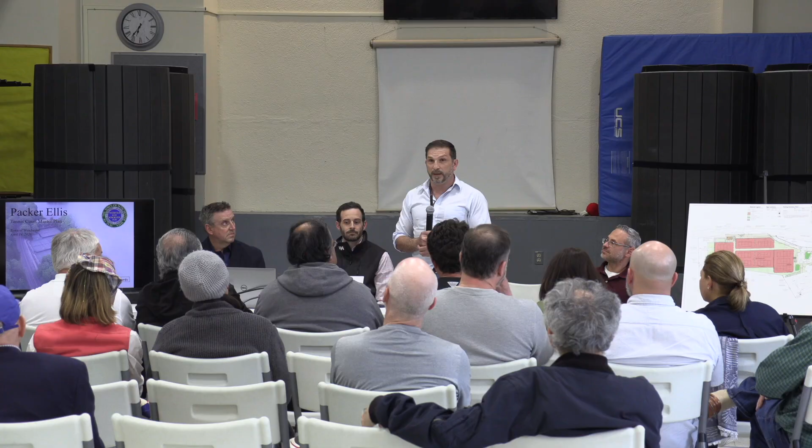As a reminder, this is a very intricate area. There's a lot happening with stormwater, the pond. The courts are over 100 years old, so it is a process, and we're getting there though. We talked about a couple years ago when we were just trying to get the wheels turning on this. It's moving, and that's a great sign.

Again, we still have a little bit more design, so we welcome feedback at the end. But I'm going to pass the mic over to our development team.

Thanks, Nick. I'm going to stay seated if that's okay with everybody. I apologize, but I'm running the computer at the same time. So can everybody see the screen to my right?

My name's Chris Huntress. I'm with Huntress Sports. We're landscape architects and planners. We specialize in athletics and recreation projects. We've been working with Jeff and his team over at VHB who are coordinating the civil and engineering side.

This is a multifaceted project. It's got parts of it that we're touching up in Palmer Street. We're talking about working in the floodplain. We've got 100-year flood here, and we're into wetland buffers down by the beach as well. So there's a lot of moving parts here, and a lot of reasons that we did what we did are driven by the regulatory aspect of some of the things that we have to deal with as well.

So I'm going to walk you through. Many of you know this site, I'm assuming most of you do. But this is an overview of just the bank of the existing courts.

This is very hard to read, I'm not going to ask you to look at this too much, but it is the existing condition survey. The reason it's here is I wanted to let everyone know we've surveyed the site, we've flagged the wetlands, we understand where the utilities are, and we understand what the opportunities and constraints are associated with this site.

So that was one of the first things that Jeff and his team did. As we advance from the existing conditions, one of the first things we did was create a master plan for the site that addressed some of the major needs. We left the orientation of the courts predominantly as they were in that east-west organization. There were, I believe, 15 courts, Nick, do I have that right?

And we've gone to 13 courts. Where we've eliminated courts are in the two banks in the middle, we've gone from 4 courts to 3 courts. The reason we've done that is, A, to give a little more separation between the courts so we can be more compliant with USTA requirements, but also to create that walkway access that would bring not only players but able-bodied and disabled individuals through the site. So that creates our accessible route to get in and around to the various courts.

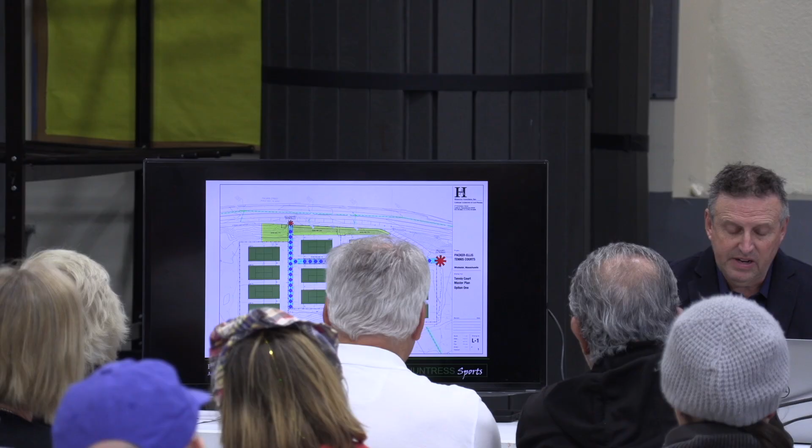So we started with this as a concept plan and then developed it into a set of working drawings. Some of it changed, but predominantly it stayed the same. This is the overall site plan.

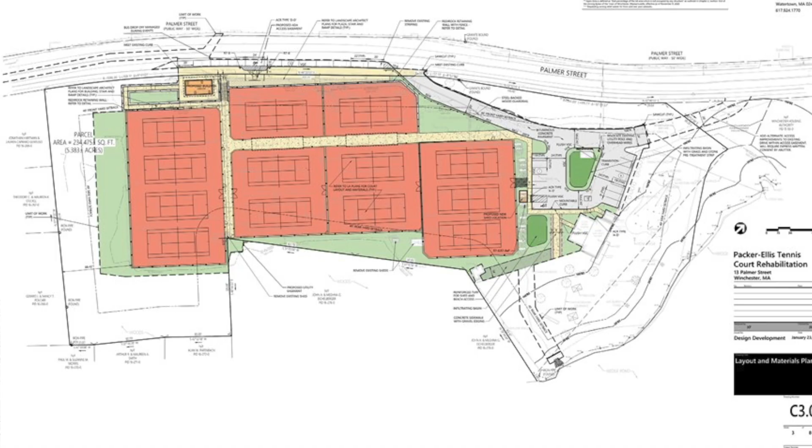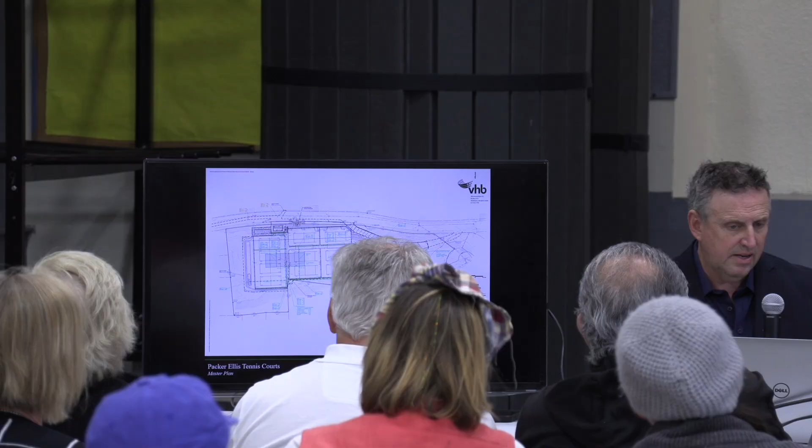We're at a total of about 13 courts with a concrete walkway that comes from the renovated parking area through the main body of the courts, and then goes perpendicular to Palmer, up through a set of stairs and a ramp system. We've placed a building up at the top along Palmer, which would be a check-in building, bathroom building, and the like, and we'll get into that in more detail. I'm going to turn this over to Jeff and let him talk a little bit more about some of the site utilities and grading and drainage issues.

Good evening, Jeff Ketteritz with VHB. So as Chris mentioned, and I'm sure you're all aware, grading and drainage and stormwater are significant considerations for this site, given our constraints with Wedge Pond. This is a unique site where it's kind of the low point of a lot of adjacent areas, with a lot of drainage coming onto this site.

So we've been studying and looking at the project itself and what we can do to mitigate that stormwater flooding and runoff, as well as trying to look at additional areas abutting and what we could do to keep water off of the courts primarily.

A couple highlights here. This is the grading and drainage plan, as Chris mentioned. Just about the entire site is within the 100-year floodplain. One important part we focused on in working with Nick and Matt was locating the facility building elevated up at Palmer Street, so it gets those facilities out of the floodplain in proximity to the street.

The courts will still remain within the floodplain, but this project includes substantial stormwater infiltration systems that will help mitigate that runoff. The gray boxes you can see are subsurface chambers that would be beneath the courts, intended to store and infiltrate stormwater runoff.

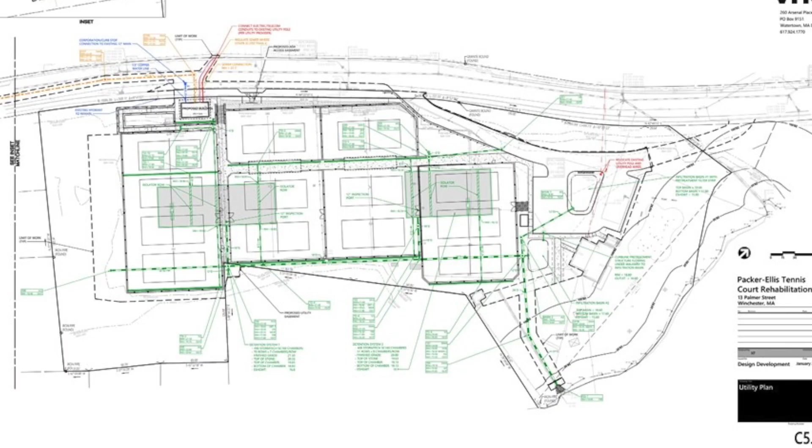The parking lot includes two surface basins, one in the middle of the parking area and one just to the south. That's intended for stormwater to sheet flow, provide water quality treatment, and get stormwater off the parking and tennis court areas.

Yes, perfect. The dark green there.

I'll flip to the utilities real quick. The green infrastructure you see here is the drainage system. As Chris mentioned, we did a full site survey. What we found of the drainage was limited at best, some pipes not functioning entirely, maybe blocked up. So the plan of this project is a full replacement of the drainage system to ensure it's functioning.

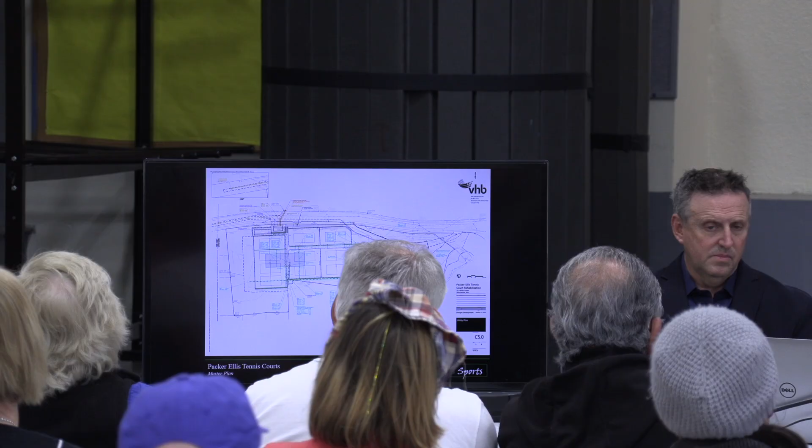This includes replacement up to the outlet at Wedge Pond. As part of the next steps, we'll need to go through the permitting process with conservation and planning to complete that review. But the intent is a full replacement of the drainage system to ensure it's functioning.

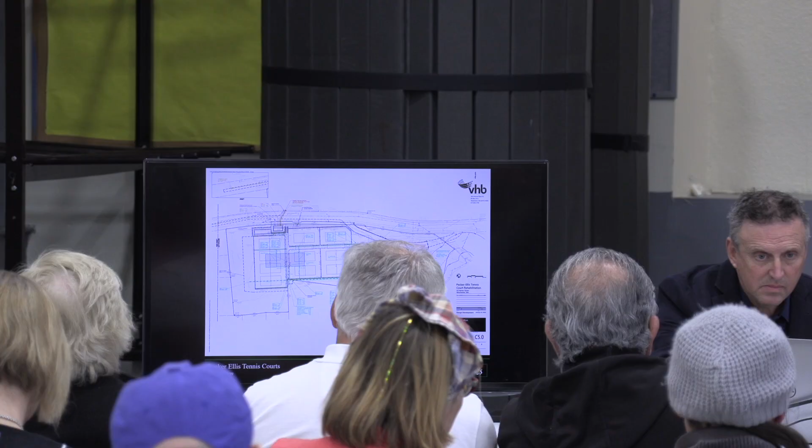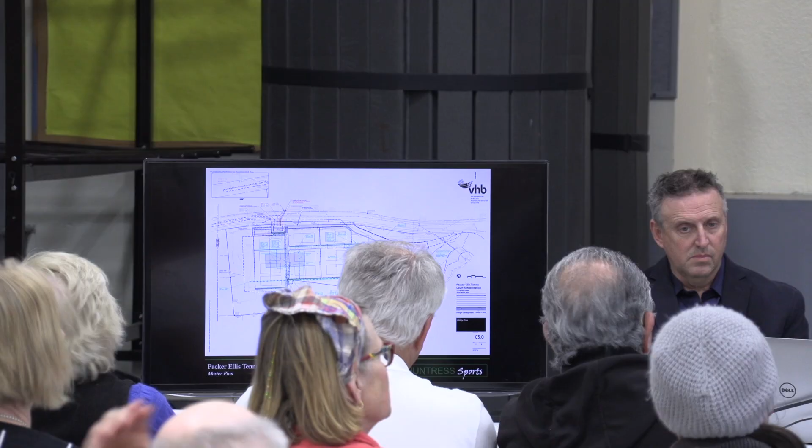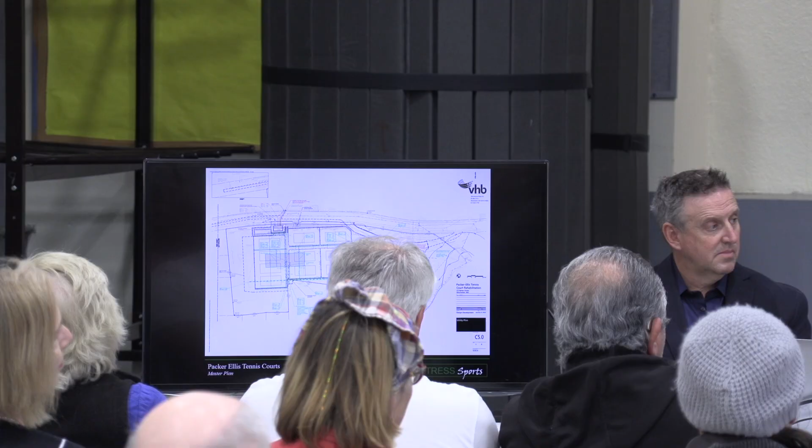Other utility-wise, the benefit of locating the facility building, which Chris can get into in more detail, up by Palmer Street, is it locates those services closer to the mains. There are some restrooms as well as the ticketing area or an office space there, with water, sewer services, as well as power to that building. So the intent is keeping that closer to Palmer Street and also, importantly, out of the floodplain.

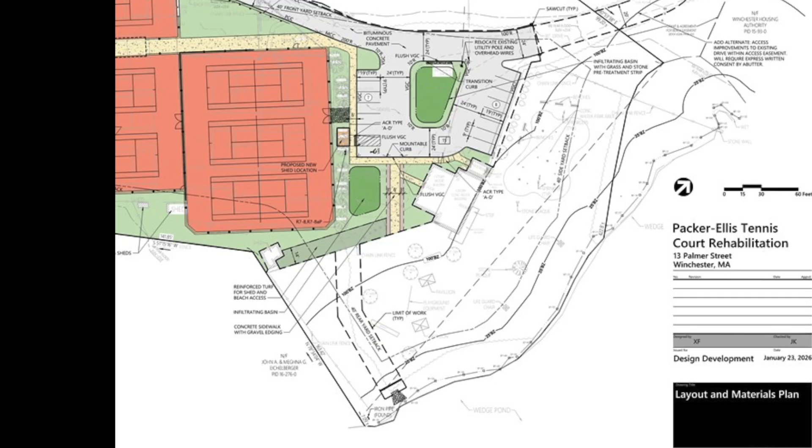This is an enlargement of the parking area, to speak to the circulation. The intent is keeping the general layout of what's out there, the gravel drive coming off. Some of the challenges: the existing drive down is probably about 12 feet wide or so, not really conducive to getting emergency vehicle access down there if it's ever needed. But we try to reinforce the parking, providing adequate drive aisle width.

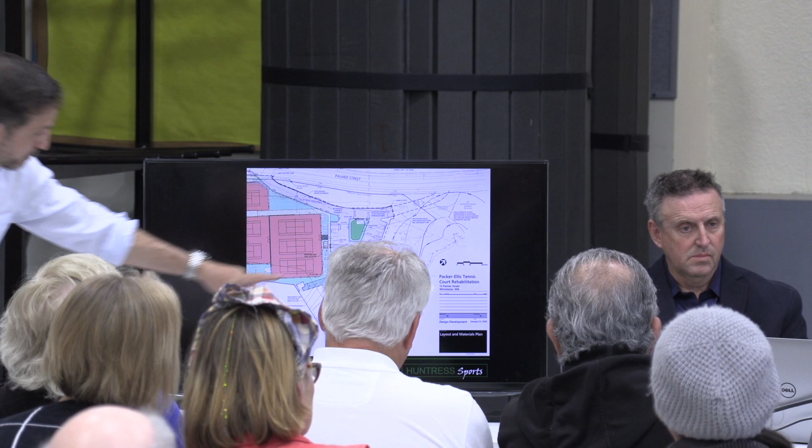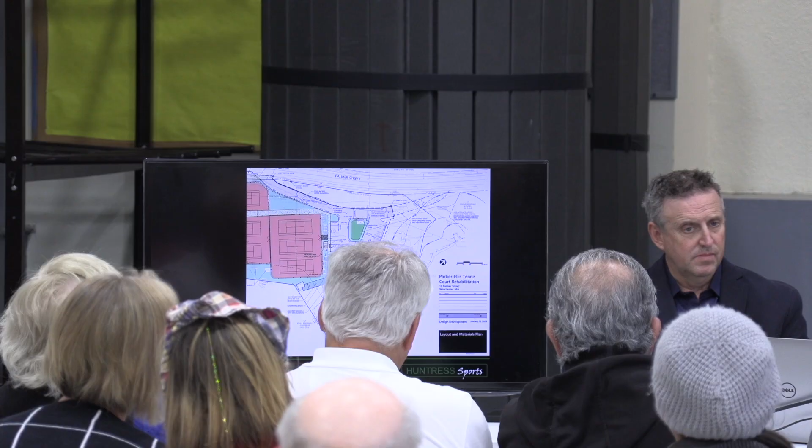So the plan includes reconstruction of the entry drive down off of Palmer Street, which is the gray hatched area, and then a bit of a loop of the parking. There are 15 parking spaces created here, including accessible parking spaces nearest to the sidewalk accessing the courts, and the intent is to maintain the existing egress drive out through the adjacent parcel. Technically it runs through the adjacent parcel from the housing authority, I believe, but that access would remain as currently.

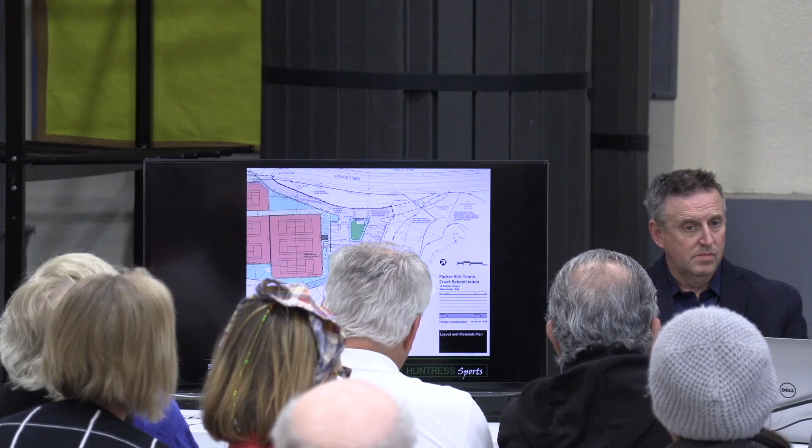There's also a sidewalk connection to the plan south, I'll call that beige, running south and then off to the bottom corner. So there's access for maintenance vehicles for delivering clay and repairing or resurfacing the courts as needed, as well as maintaining an access point to the beach for the town.

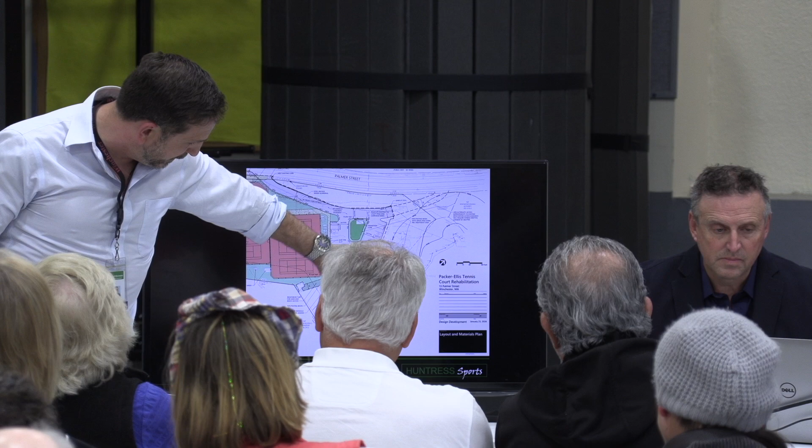Before we jump off of that, their scope ends where that begins, so the new volleyball courts come in here. This is your Wedge Pond, this is all the beachfront, and this is the beach house. The volleyball courts will be here and here. Can the beach house stay? Yes, the beach house stays in this current design; we haven't been asked to take it away.

I did want to point out, one of the things impacted by this new driveway coming into the site, or this reconstructed driveway, is the existing practice board area. Because this driveway got a little wider and the grades associated with that had to go further down into the site, we removed that, and that's one of the things we're working with Nick on, as to where the backboard area goes. We've had that as a discussion topic and are looking for a solution for the next round as we go towards construction. We've got several options, so we're kicking those around.

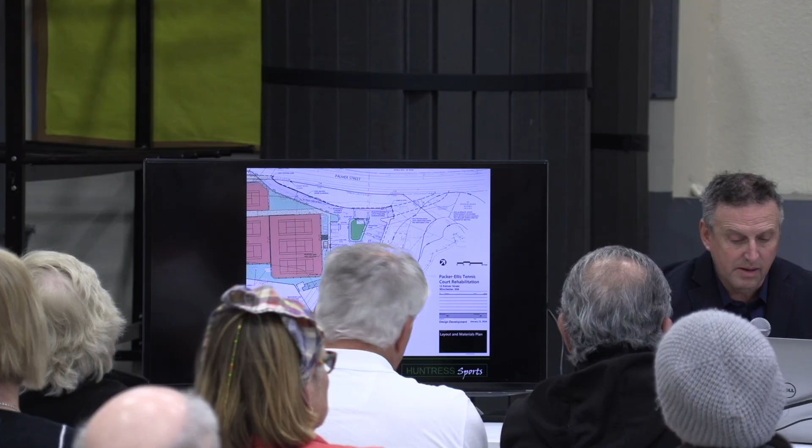We're going to figure out what the plan is. It may go to another facility, it may go somewhere else. If you've got questions on that, I'd be happy to stick around at the end and talk about what some of the various options are that we're looking at.

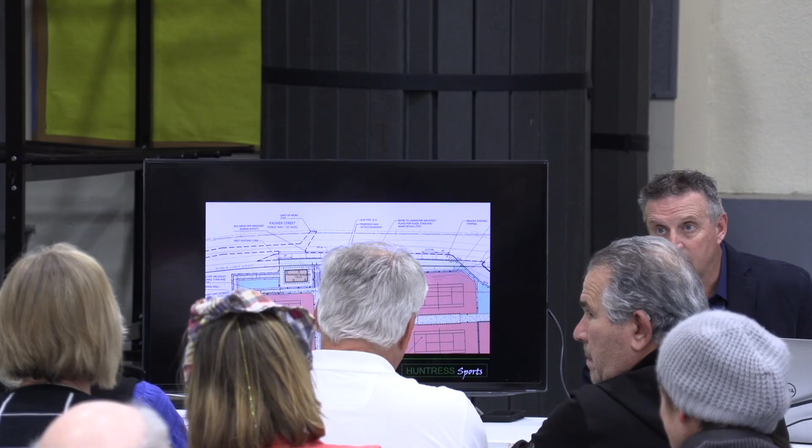The tree would be taken down as part of the plan. Yep, that one's dying actually. We've been holding on, but it's dropping. That's the one branches that people complain about every year because the limbs are dying. It is a beautiful tree, though.

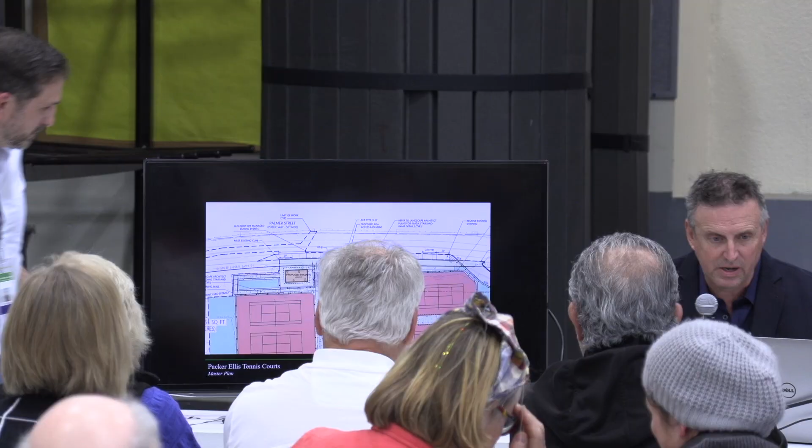So I'm going to walk you through the plan as it touches Palmer Street, and we'll talk a little bit more about the building and those areas. But Nick, maybe you can help me point. Start over by the reconstructed driveway.

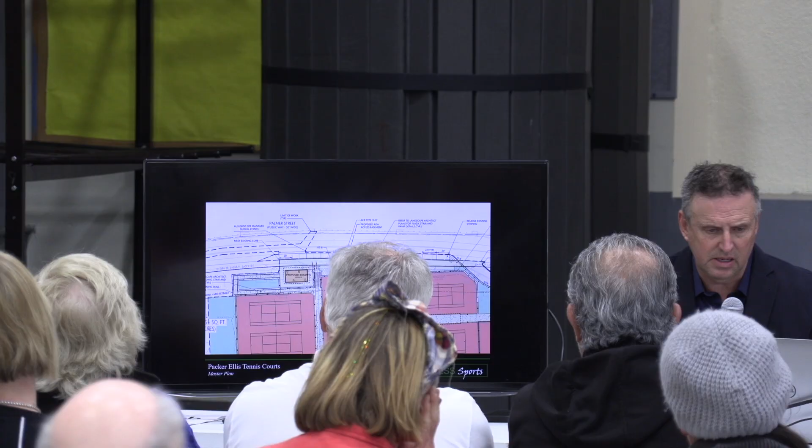We are replacing the wall in its entirety all along the front, and we would have 19 feet off the edge of the courts closest to the wall, from the edge of court over to the base of the wall. The base of the wall is roughly in the location of the existing base today because of floodplain issues. It's about 9.5 feet tall and would run all the way along those two courts.

It would terminate into a set of stairs that would come down from the upper drop-off area and into that middle aisle. Immediately beyond that would be the check-in building at Palmer Street elevation, and further to the left of that would be a ramp system for ADA access that would get you down and into the courts and tie into the walkway.

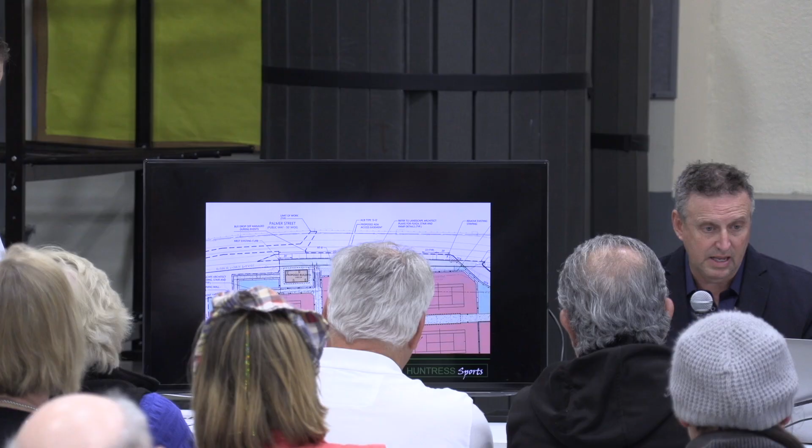So we were able to create what was kind of a secondary egress point into a primary egress point by making it handicapped accessible, getting the building up and out of the floodplain, which has a lot of benefit, and taking advantage of some of those grades and utility access points further down Palmer.

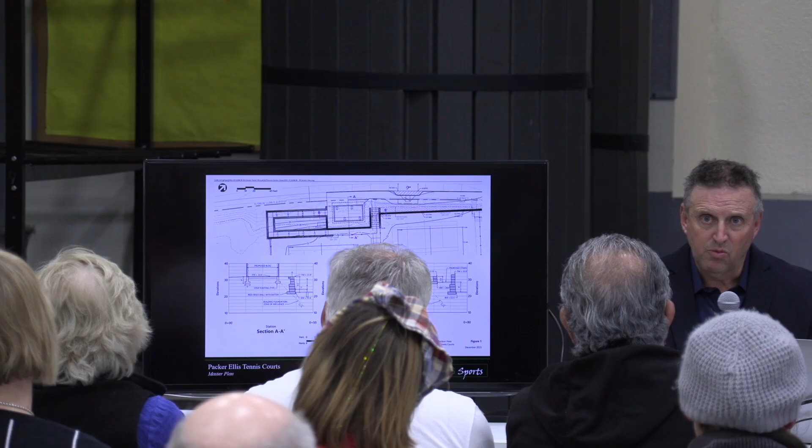I'm going to go quickly over this plan because it's tough to read, admittedly. This is a cross-section through the site that shows some of the grade changes between the building and down to the courts. In essence, it's a 9.5 foot tall wall that would drop down to court level. When you're up at the street, we're going all the way from the curb to the wall. Let me back up there.

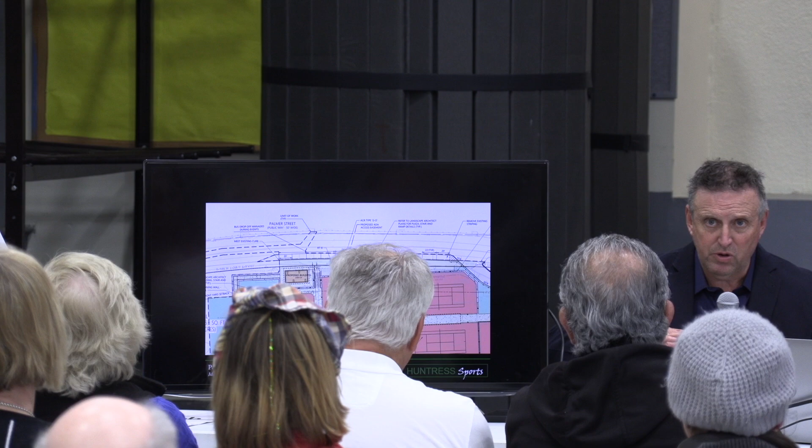All the way from the curb at Palmer over to the wall would be a flat concrete terrace that would effectively give you a viewing area. We can talk about whether we put benches up there, shade structures, or other things, but what we tried to do is create that flat terrace and viewing platform with a 4-foot ornamental fence that would be a barricade.

The existing fence would be gone. The existing walls and the existing cobble slope would all go away, and a new wall would be constructed in front. That also requires some utility work within Palmer Street itself, but provides a much more stable condition than we have today.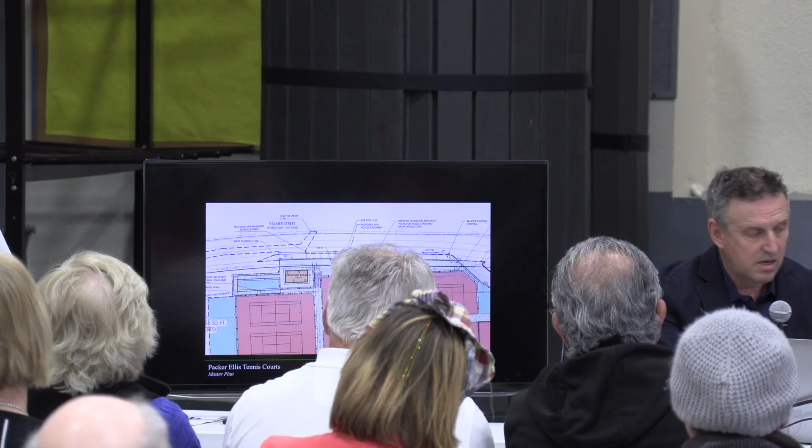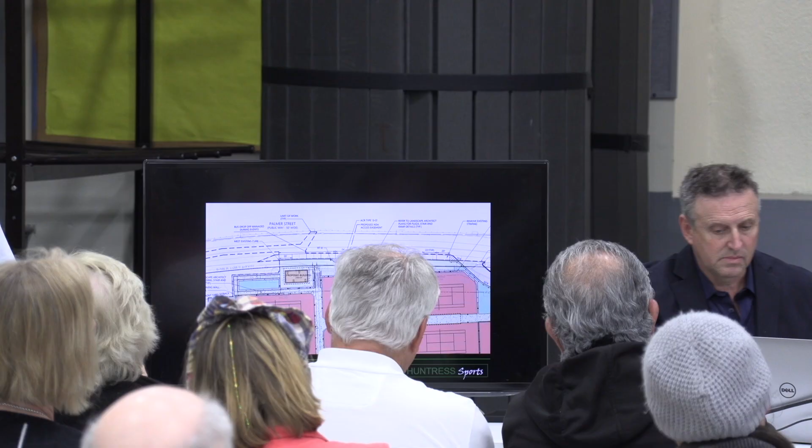And maybe just to tack on the wall note - we studied pretty heavily our options to address the wall. Was there a way we could salvage part of it, repair it? After reviewing with our geotechnical and structural engineers, it wasn't appropriate to do that, which is why we're presenting to essentially reconstruct the entire wall.

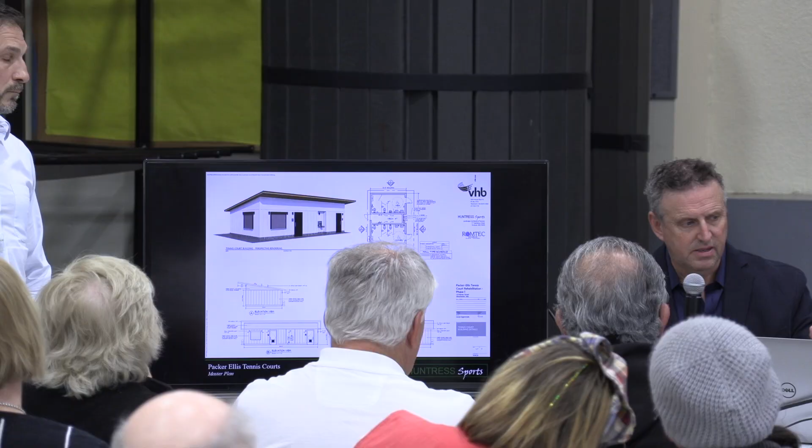Roughly, yes - at its highest point it's 9 feet. The material will be concrete, but it will be faced with what's called a monolithic block. The individual blocks are about the size of this table, but they have a pressed front that makes it look like natural stone. You can get New England granite, limestone face - there are a lot of different options.

Those would be your options on the wall. One of the things I want to point out, which I thought was really important, is it creates a congregation zone where we can gather after tournaments. We can set up tables and vendors and stuff like that. So it gives us quite a bit more space up there to do that, and that was important to us.

What about viewing on this side? The canopy, the existing structure - all of that's going to go away. Gone, correct. Your viewing would be from that upper terrace all the way across the middle two banks of courts, and we left an 8-foot walkway around the back side of the proposed building so you could circulate around the back and see that other bank of courts. I think your visibility down and into the site is actually going to be significantly improved.

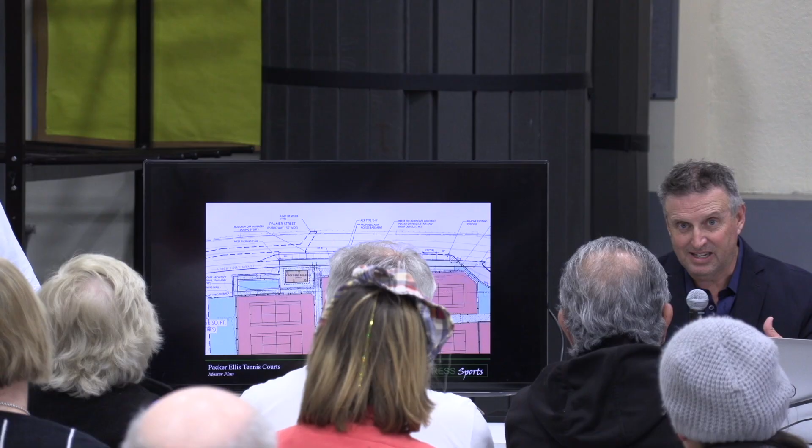We did look at some options that included banked terrace bleacher seating and a few other things, but the cost of that got very expensive very quickly. This was a more cost-effective way to approach it, but I think in the end it's a much more usable space as well, because it gives you a lot more flexibility up at the top.

Currently there's one long bench. Right, so it's been accommodating for the most part. It's not like you need a bleacher there. I don't think so - I think we may want to consider some benches up here. My thought was we would do some backless benches through the middle of that space. You could face either way.

Much of everything that you see on the existing hillside now—the walls, the fences, benches, trees—have to go, because that's all concrete. We poured concrete, put in all those.

If there are benches that can be salvaged, we can take those out before we do the demo and save them to reuse. We've done that on other projects, so if they're in good shape, we just relocate them. People have purchased those and there are name plaques on them—that was a beautiful area to sit and watch.

The problem is it's not presently handicap accessible, so we can't keep it as is. We can salvage those piece benches though.

What we want to do with this area is encompass it to create a beautiful sitting area. We anticipate benches, shade structures—that's all in this plan. We've even talked about some lights along here to give more visibility and make it safer when it's dusk and you're leaving.

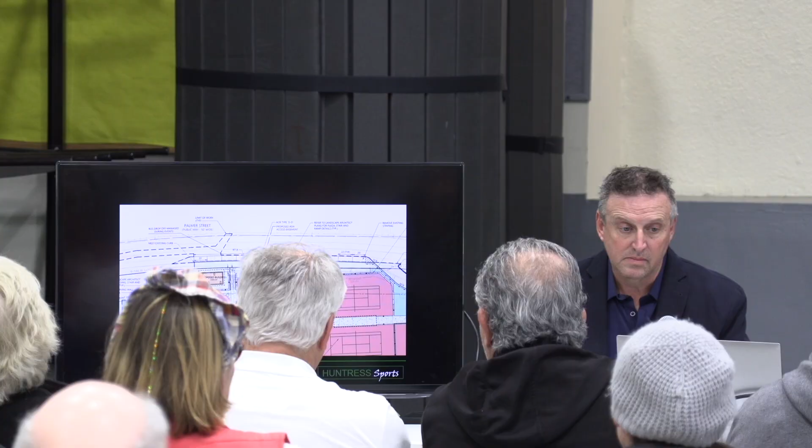Right now, for example, we've expanded this to 3 or 4 picnic benches. Whenever there's a tournament or a Friday night social, we bring in food or drinks, and this becomes a continuous meeting place. I think you'll have more space to do those kinds of activities in this plan than you do presently on the current site, and it will be accessible to everybody.

By having it in this area, the viewpoint to these courts is a bit more difficult since this is gone. That's right—there is not seating over in that area.

Let's say there is a fountain here—that's where the handicap ramp comes down.

Think about how it goes down, it'll be kind of a wall—there'll be a series of terrace walls through that. But this will all be areas where people can also gather.

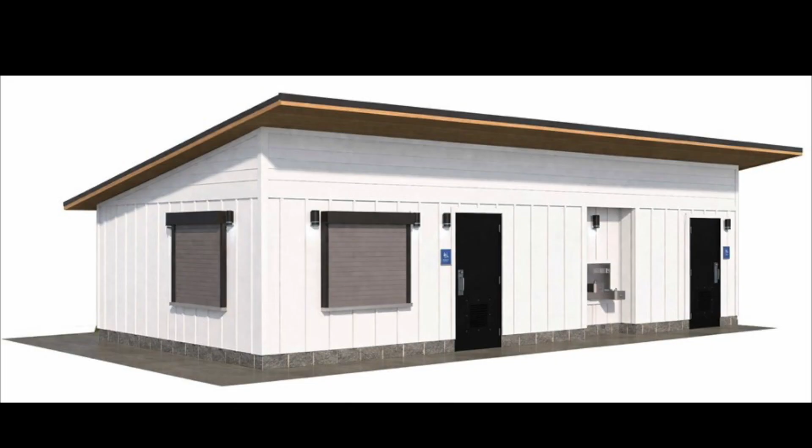This is an example of what the building would look like up on Packer Street, and this is where we are today. It could be like this, it could be different, but this is one example.

The program of this building is that the two roll-up windows you see would be the location of the check-in and office component of the site. The two doors just to the right would be a women's room and a men's room, and you see a water bottle filling station in the middle. There would be some storage and mechanical space within the building, but the primary goal is office and check-in space on the left side, men's room, women's room, and utility corridor access.

So it would be a single-slope building with a board and batten finish, using fiber cement board and batten like a Hardie plank type of finish—here's a better close-up look at it. This is a fairly efficient building, and I think a reasonably attractive one as well.

Having it right up on the arrival point at Packer provides a lot of value. The other important thing about bringing it up to Packer is it made our utility connections for water and sewer much easier, since the utilities were significantly closer—not right there, but closer. That's a water fountain and a water bottle filling station.

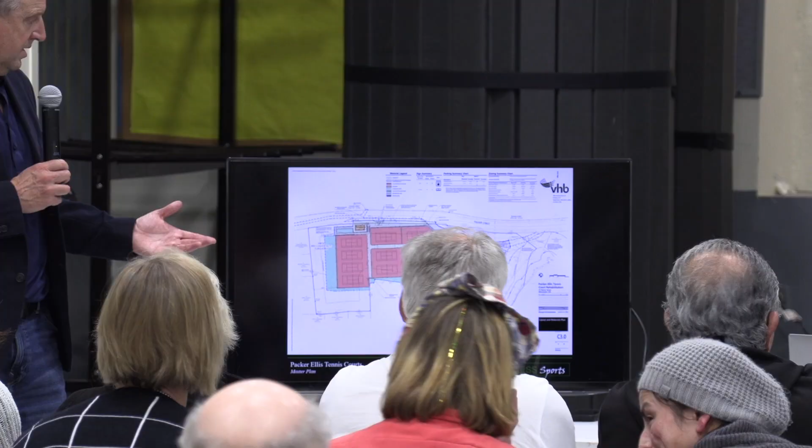We do have some green space that we've created up around the top, mostly within this ramp area. We've got green space through here that we can plant. We haven't talked much about it, but Nick, if you wanted street tree plantings around Packer, we could do that. We've certainly created room for root growth by moving that wall, or that walkway terrace, out.

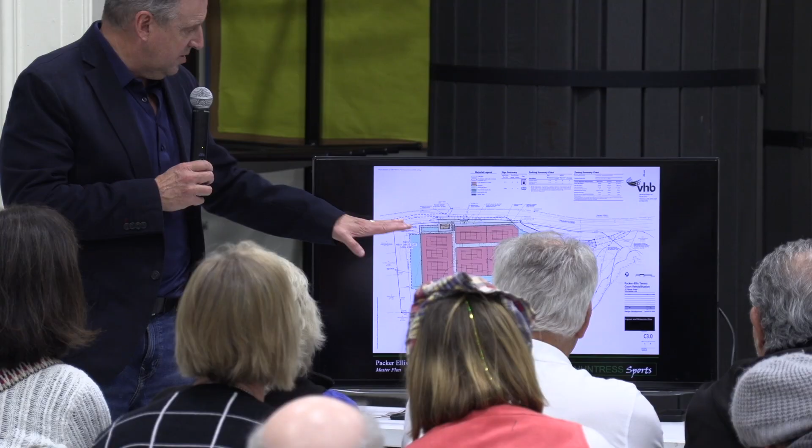But beyond that, we'd have to look at periphery areas—say down in the parking lot by the beach, or potentially up by this ramp, or off to the side. We own a little bit more land this way. This area is predominantly forested through here.

There'll be a little bit of clearing of some of the pines in this area for a couple of reasons. One is for stormwater, the other is to get some of the pine needles away from the court surface here. But there's room around these peripheries to plant if that's what the town would like to do.

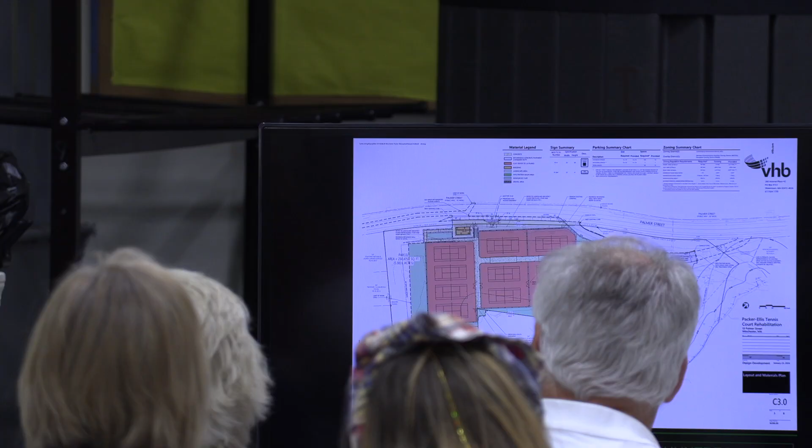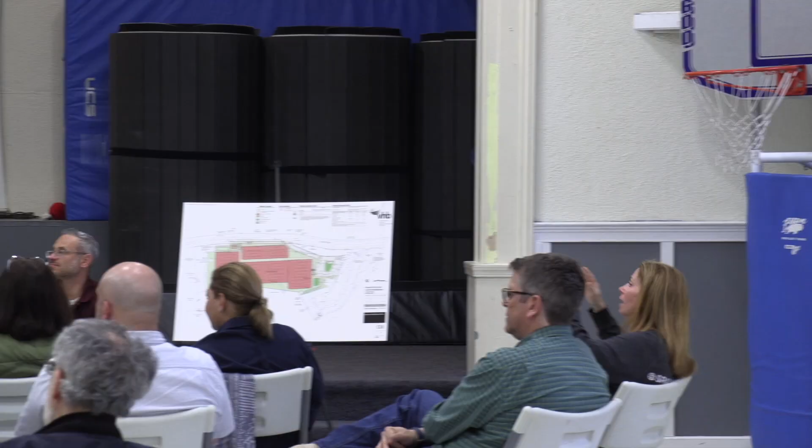What about irrigation? Are they gonna be sprinklers or underground? It will be a little bit of a combination of both, but we haven't designed the irrigation system yet. It's part of the construction document phase. Right now we're just trying to get everything organized. Obviously, other places, when irrigation is under the courts, it's much more even. I expect it'll be a subsurface irrigation system. I just have to coordinate it with all Jeff's utilities.

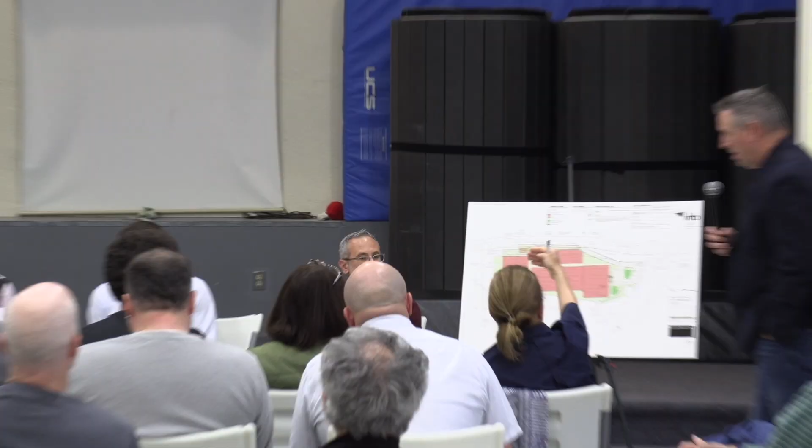That's huge. Yes, there was a question down here. So this area where the slope is for the handicap, right here, the middle, the green. Yes. What do you anticipate? Is that okay, since the slope is down, could you put bleachers there, for example?

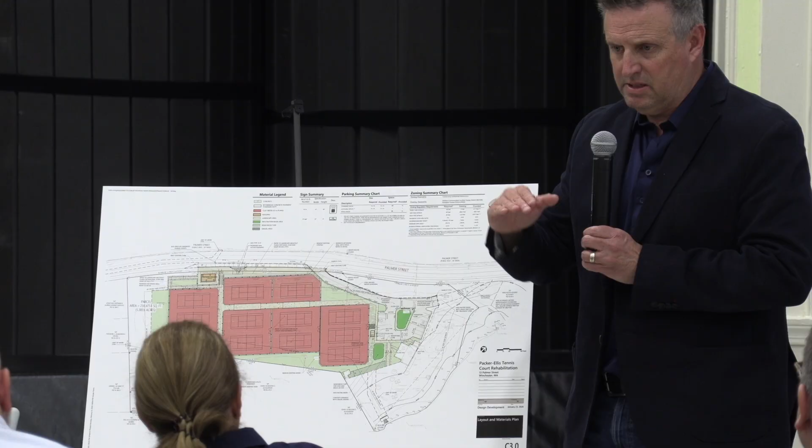We could consider a terrace or a bleacher in there. It's an odd space because this wall that is along the interior is going to be constantly changing in elevation as it moves around. What we would have to do is pick up this wall basically to the elevation of where this building is and create kind of an extended platform over here. So the short answer is, could we do it? Yes, we could. It would be dramatically expensive because of the wall work and the additional site work that would be required there.

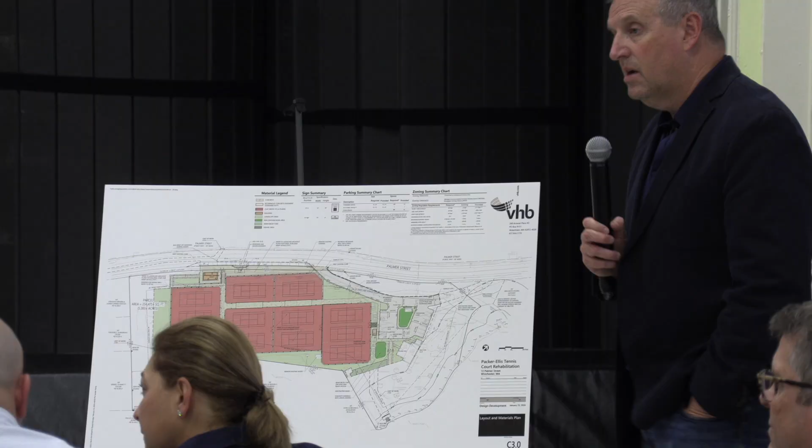Possibly, yes sir. What's the odds of this getting passed? Does the town have to vote? I'm not a gambler, so I'm gonna give that to Nick. We don't want to get excited and all of a sudden it's 7 years?

Great question. I've been in the town for 6 years, and not a lot had happened with recreation spaces. In the last 6 years a lot of things have occurred, including the WCCP, the community preservation group, and there's dedicated funds now that have to be spent on open space and recreation. At least 10% of the total take has to go towards that. There's a backlog of projects, but this is one of those top tier projects we're going to be putting forward. They're not going to pay for the entire project, but there will be some money we can start to go for, and we're in a good spot because that was never there before. Last year, in their year one, the amount they had in the account was $1.6 million, and they didn't spend it all. So there were 4 or 5 actually recreation-based projects that got funded or partially funded out of that account.

There's also affordable housing that's in one of its own bucket, and also historic preservation. Now this could also qualify for historic preservation, so it could be a historic preservation WCCP ask, and it could be recreation. I'm not an expert in it, but I know that a 102-year-old clay tennis court, to me, sounds like historic preservation. So we might be able to get a little bit more than the typical recreation take on a project like this. What's the timetable?

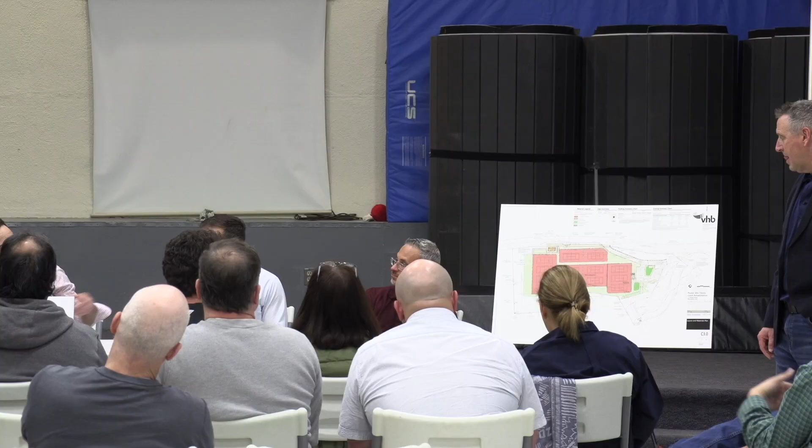It's very dangerous over there, and that's part of some of the discussions we've had. Along this edge touching Palmer, we've better delineated some of the spaces, and added a handicap drop-off area and parking space. So we've got accessibility from the upside, and we widened some of the paving to give a better turning radius. There are some better protected spaces up along Palmer, plus the one handicap space. Another part of that drop-off is to accommodate buses for students, with the intent for them to load and unload safely at that location.

Any thought to the monument? The Packer Ellis monument, to redeploy it? Yeah, when we do these projects we typically find a way to integrate all that stuff and keep it. We just did it over at one of the parks, the new playground at McDonald, where we integrated a lot of that and kept it. So that'll definitely be something we continue to make sure is taken care of.

Could you talk a little bit about how you're going to reconstruct the tennis courts? Are you going to dig down and create a new foundation and base and build it up that way, or just how do you approach it? Sure.

Yeah, we're planning on a full replacement of the entire profile of the court—not just the clay surface, but the aggregate supporting it beneath. We'll probably rip most of it up anyway to get the drainage systems we're looking at, and as part of restoring it, there will be completely new base material.

Oh, awesome. Awesome.

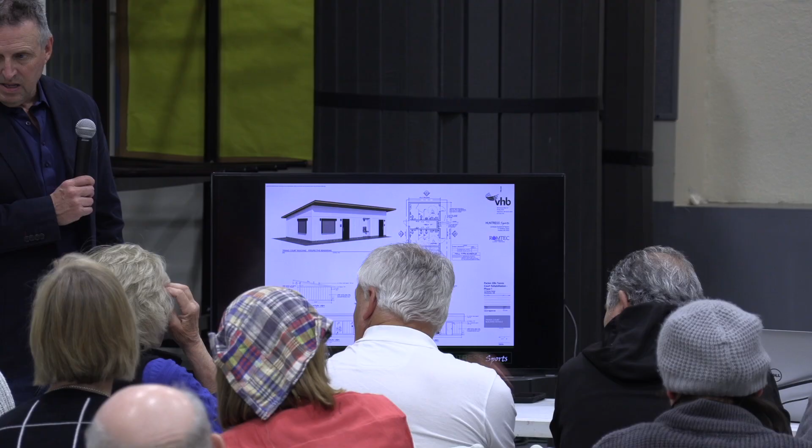So you can walk around the back of that building to view the courts. If you're in that building, you can just step outside and you'll have good visibility of the courts. Court attendants—sometimes it's hot and they want to get out of the beating sun—so they have to get out of the building to see all the courts.

Well, they do and they don't. If they physically want to see them, yes, they do. But we also talked about a camera system that could give anybody inside this building visibility across all the courts from a safety perspective. If they just want to get out and see the courts, I'm just thinking of the safety, so they can see if somebody's fallen. There will be cameras showing all the courts. If they want to see anything, all they have to do is take a step out the back door—there's a 4-foot walkway to a fence, and they're 9.5 feet above the court level. They can see all the courts.

One thing to note too is this is just an example of what the building could look like. We could, if we decided we wanted to put a window back there—that makes sense, something we could consider. Yeah, one thing that would be difficult would be to take that building and move it 8 feet back to integrate it with the wall. Just from a structural standpoint, it changes the whole foundation design and gets a lot more expensive, which is why we kept it intentionally with an 8-foot walk around it so we could do a traditional foundation. And we can certainly add a window.

Anybody else? Thank you. We'll stick...